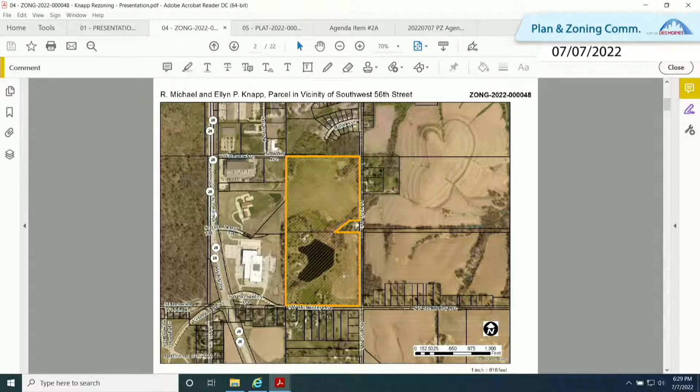This map provides a little more detail regarding the change in zoning and land use, because there are a few different zoning districts and land use designations that overlap within the property. As you can see, the portion to the north that's yellow is already zoned N2B residential.

This portion here is being rezoned, requested to change from business park to low-density residential, as is this portion to the southwest. This large white area in the middle is an airport development control zone covering part of the property, and this triangle to the southeast is the runway protection zone, which also has development control.

The summary is that all of these portions are being requested to be rezoned to N2B, except for this small outlot identified in the large-scale development plan, which is essentially the runway protection zone that is not developable per airport regulations.

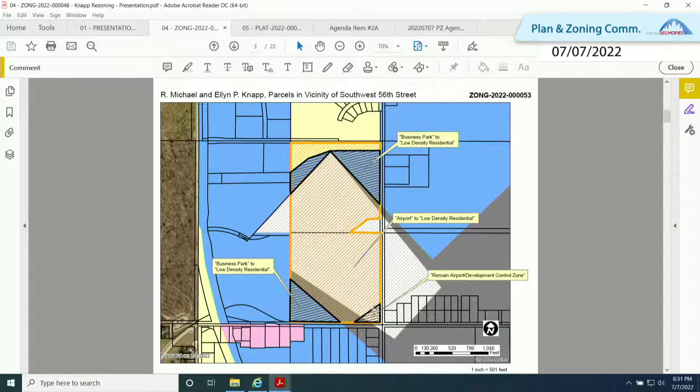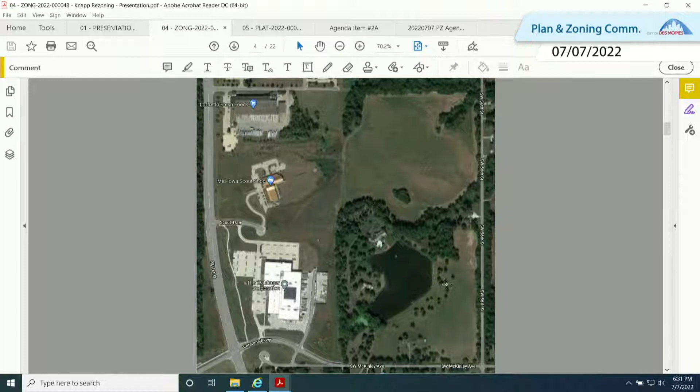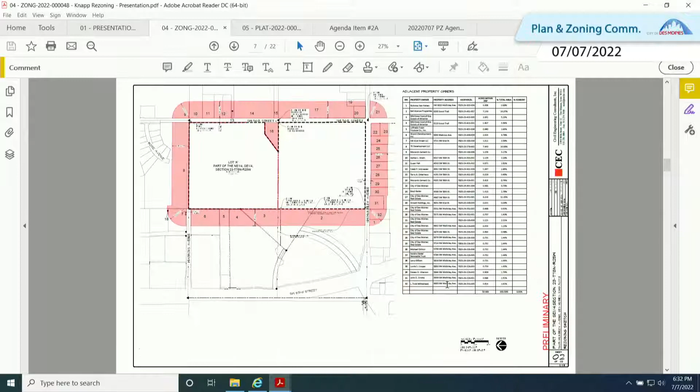This is the rezoning sketch submitted by the applicant — again, I apologize for the slow transition between slides. Here is the large-scale development plan that was submitted.

The applicant is currently proposing to develop the northern parcel, so you can see the proposed layout here. There are currently no plans to develop the southern parcel, but per our large-scale development plan requirements, contiguous parcels belonging to the same landowner have to be included in the plan, so it's shown here as well as in the rezoning proposal. The undevelopable outlot within the runway protection zone is also shown in the plan.

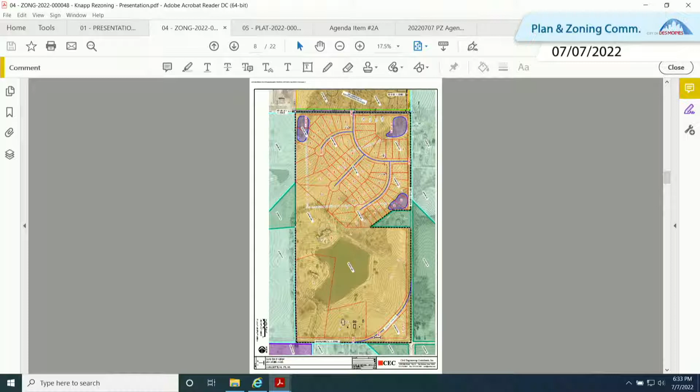With that, I'll move on to the staff recommendation. Staff has reviewed the rezoning request, and we believe the rezoning to N2B and residential use is appropriate for this area. There are some conditions that need to be adhered to, so staff has worked with the applicant and been in communication with the Des Moines International Airport to ensure any future development concurs with all necessary regulations. Staff is recommending approval of the rezoning with 6 zoning conditions, and I'm going to zoom in so you can read them.

It's not frozen, but it's not connecting to the projector. I can put the...

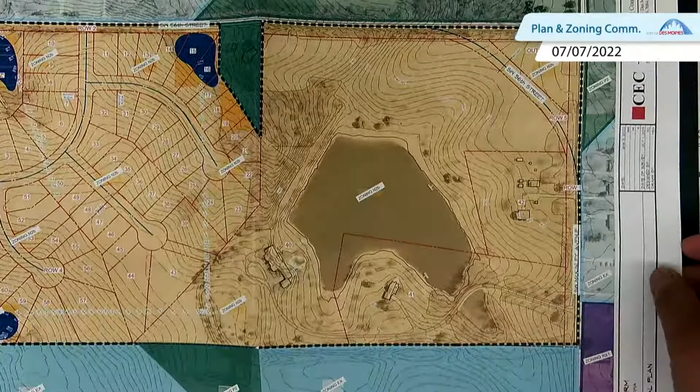Yeah, that was my only concern, because I knew the development was going to take place, and noticing that it does clip part of that property, I didn't know if that would be a problem for the airport's development, and then would it be a hindrance to the potential residents living there. But as long as it meets spec and it's okay, that was my only concern.

Yeah, the runway protection zone is the area that the Federal Aviation Administration describes as the area which might be prone to risk if there is an airplane crash or something while landing or taking off. So there's a kind of a buffer that goes beyond the runway area, which is identified as the runway protection zone area.

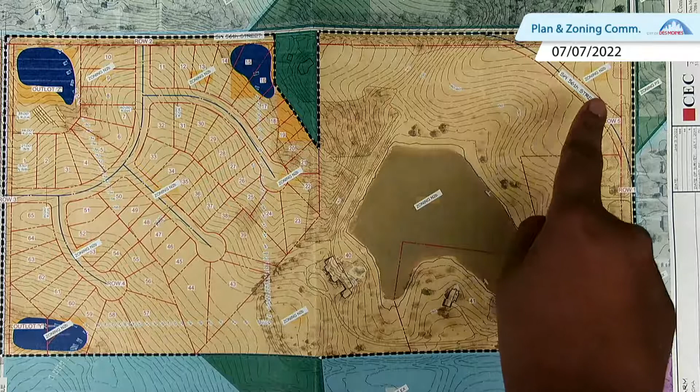And here's the corner that Bert was talking about, with the updated airport plan. This is the only corner that falls within the runway protection zone now for these two parcels. There are other adjacent parcels that have portions of the runway protection zone going through them, but for these two parcels, that's the only corner. That's also why Southwest 56th Street is being realigned, you can see how it curves right here, to essentially get it out of the runway protection zone.

You were also saying that development would be required for the rest of that land? Are you talking about the parcel to the south? No, it is not a requirement. The current zoning is not appropriate for this area because a lot of it is zoned business park and public, P2 public district right now. The applicant can talk about this more, but from what we understand, they don't have any intention at the moment to develop this area. If in the future they do, they would probably do low-density residential, so the N2B zone would be more appropriate than P2 or EX district. Thank you.

Are there any other questions from the commission? Okay, seeing none, thank you, Shriyoshi. If the applicant can present, they have 10 minutes. Please state your name and address.

Paul Clausen, Civil Engineering Consultants, 2400 86th Street, Unit 12, Urbandale, Iowa. Just to hit on a few things: given the vicinity of this to the airport, there is a noise avigation easement which sets restrictions and building requirements, and also elevation requirements for the glide paths for the airplanes, which is why we're not proposing any development with this large-scale development plan on that south portion. There's really too many limitations with the elevations to build a house on that property.

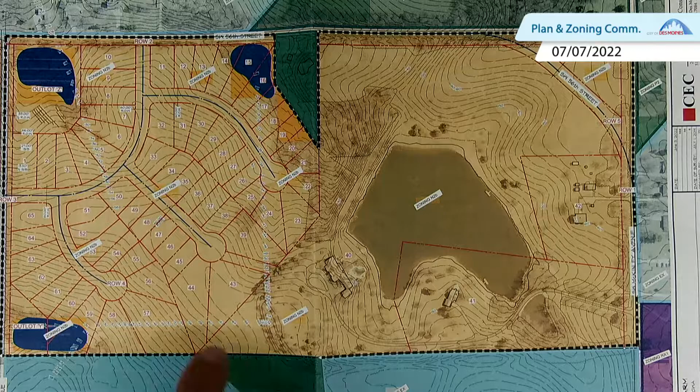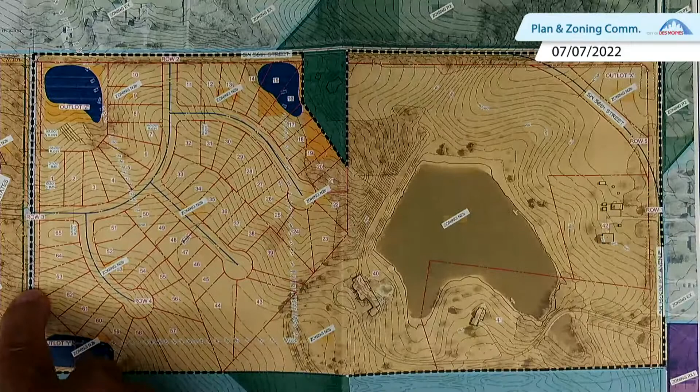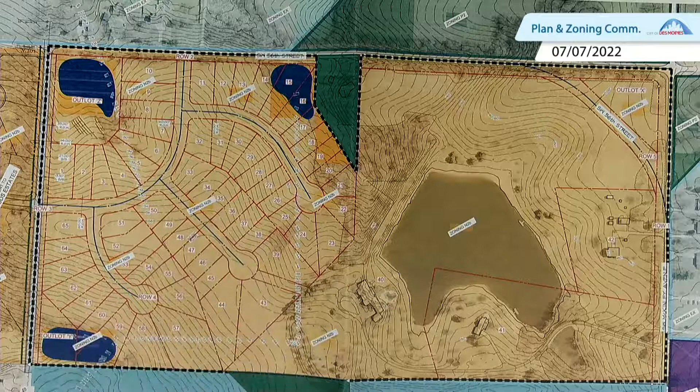So it would change the large-scale development plan? It would what? This is your large-scale development plan that we have. Oh yeah, I mean, it was like... I don't know. Well, what I'd like to suggest is maybe we just get this on the books, move this forward.

Get it on the books, and then if you want to tweak something, I mean, obviously we had a speaker tonight that was pushing density, and we wouldn't be opposed to that as staff if it's done right. So, but I would need to continue it, we would need to update the large scale development plan, and I just think it slows you down. I agree with you. I don't think anybody would object to it in the long run, and I don't know that I want to do it, so. Okay, if that works, let's just do that, so we can get you moving forward. Yep, all right, thank you.

If this has been resolved between the city and the applicant, which I think it has, then I'd move the staff recommendation.

Sorry, Carolyn? Okay, that's what I thought. I was moving to vote, but then I thought Carolyn had something to say.

All those in favor, raise your right hand, please. Johnny, how do you vote? Yes. Dory, how do you vote? Yes. Passes 10-0.

Okay, moving on to item number 5, I'm not following my scribbles. Item number 5, is that right, Nick? Yeah, let's try it, if it works. Hey, Tyler, could you flip it back?

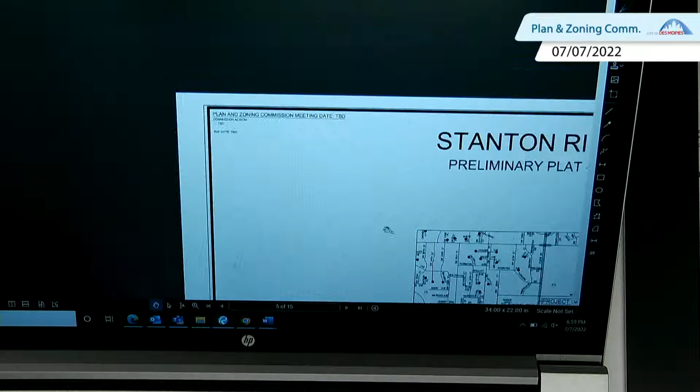All right, so I've got to zoom out now, digging into the plat document here. So here's basically a basic layout of what they want to do. Here's the street extension. The cul-de-sac would get reconstructed to mirror a typical public residential street section in the city of Des Moines, curving all the way up to Stanton Avenue. Here's all the lots, 26 lots like I said earlier, each larger than 8,000 square feet, so these are relatively large single-family type lots.

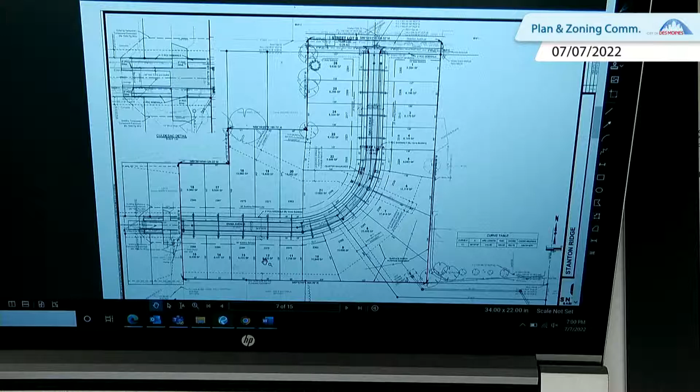A couple of conditions I want to note as we dig into the staff recommendation. The zoning of this property is N3A Neighborhood District, which necessitates house type B, so as one of the conditions for future development on this plat, all of the homes would be developed with that house type B architectural style in terms of building siding, building materials, that sort of thing.

Additionally, public sidewalks are required on both sides of the street. We made that a condition of approval, required as part of the public improvements. In terms of utility hookups, the applicant is proposing to extend existing public utilities and tap into those to enhance that public infrastructure, so their sanitary sewer, storm sewer, and water service will be provided within Emma Avenue, connecting to existing off-site city infrastructure to the west. The engineer is here tonight and can talk about that in more detail than I could.

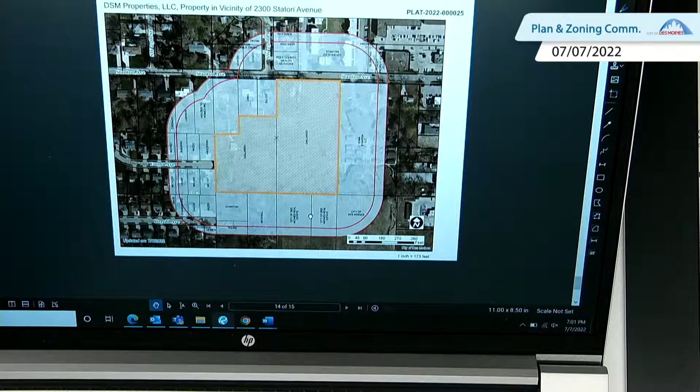We didn't receive any comments beforehand. I was able to talk to some folks before, and they might come up again and talk about this a little bit, but beforehand we did not receive any comment cards. So with that, I'll take any questions.

I have a question. With the aerial map that you have up right now, there's a couple structures on the proposed development area. Have those already been removed, or are there plans to remove them, or are they staying?

I believe this one has been removed so far. There are plans to eventually remove both. So this one, both of them will go away. I believe this one has already been removed, and this one might be in the process of. I'm not 100% sure. The one on the western edge, is here.

Is that a garage? It's a shed. Because it looks like there might be a driveway going to it, but that could be a shed. It was not a dwelling, basically.

And the other dwelling has not been removed yet? Correct, as far as I know. I think the image that I actually showed from earlier actually showed that, so it was still there.

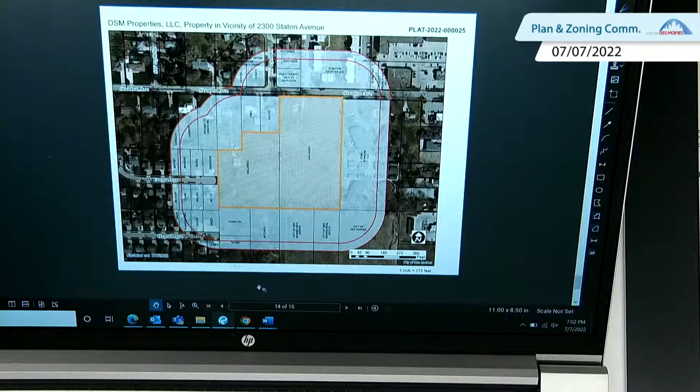Any other questions? Seeing none.

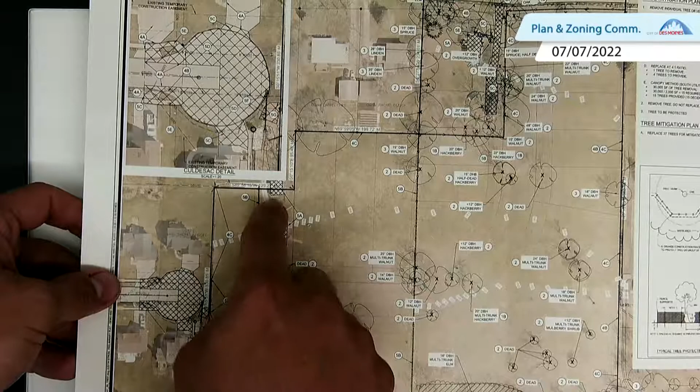To address one of your questions you just asked, that home that's on the west half, over on this side, this garage right here, this was a single parcel all the way back to here and has since been replatted back to this line. So as part of that replatting process, this owner removed this garage back to the property line. So it shows up on here, it's removed now, it's been replatted so that it can be encompassed in this new development. The existing lot on this side is planned to be removed and encompassed into the development.

It has not been removed yet. We're waiting for approval on these plans before we initiate that process.

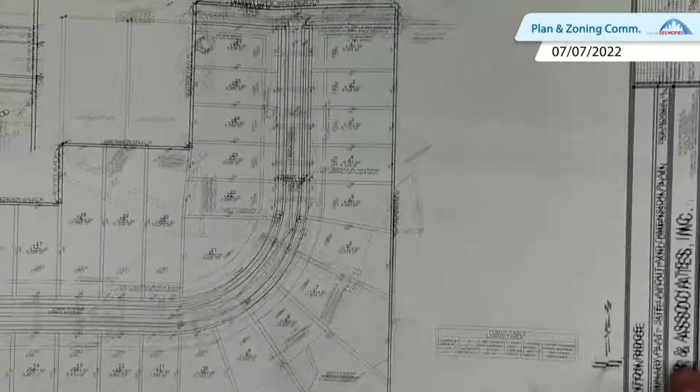One of the primary things I wanted to point out was the utilities. The plan is to extend water main from Emma all the way through and up to Stanton. Sanitary is actually located all the way down to the east, and we're at the bottom of the world down here. So the way we're pulling in sanitary is through the airport property up into the development in order to facilitate servicing all of these new lots.

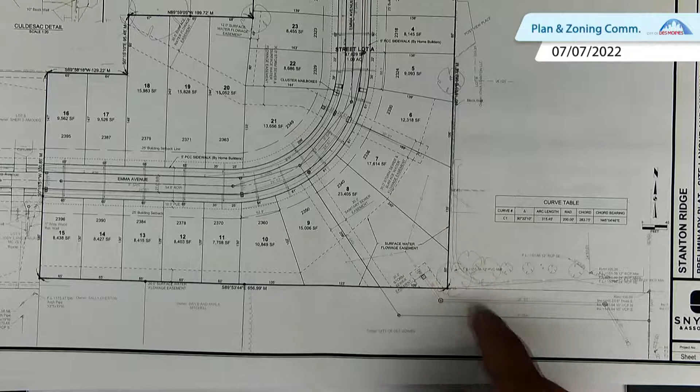Stormwater, same thing. The low point of the site all drains down to here to provide enough depth and volume for us. We're also utilizing that same corridor we're doing with the sanitary and piping it down to a further elevation. All of these improvements on the airport property have been coordinated with the city. They're all below ground infrastructure improvements that don't impact any grading or any issues with the airport. And as these are public utilities, we've been able to coordinate no requirement for any easements, as the city owns the land that the utilities are going through.

I know one of the homeowners on this corner is here in attendance that we talked to earlier before the meeting started. There's a small detention facility that's located there currently. All of the storm runoff from Emma Avenue on both sides of the street pools and is facilitated into this right now, along with the runoff that comes from the back of the homes. As part of this, we're pushing through Emma Avenue, so all of that drainage that was directed into their pond will now continue into the storm sewer infrastructure and through the street down to our new pond down here.

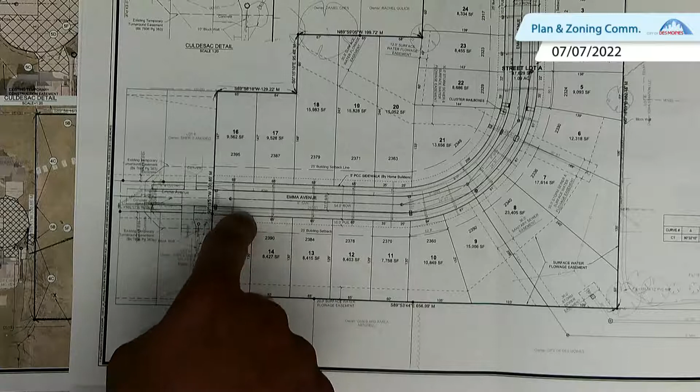We won't be able to get rid of this facility as it directs all of the runoff from the back of the yards behind and through, but we'll be able to mitigate and reduce substantially the amount of water that's able to sit and stand here in today's conditions. And I know they were talking about having some issues with the existing pipe that might be out there right now, might be plugged or it might not be functioning as it does today. So as part of these improvements, we're taking that out and just facilitating a way to provide the runoff a path to go to our new detention facility.

Got any questions? Otherwise, we can give opportunity for others to talk, and then I can come back up for questions too. Are there any questions from the commissioners? All right. Seeing none, thank you very much.

If there is anyone from the public who would like to speak in favor of this or neutral, you may come forward.

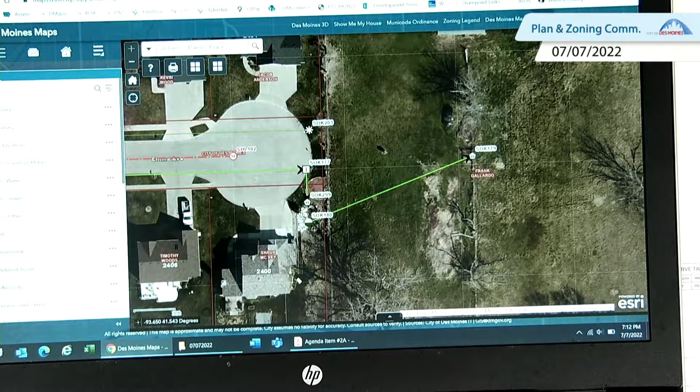Justin, I think you noted a little bit about this in your presentation, what will take some of the water pressure off of that with the street extension, but there's some stuff that will still come out of the backyards. I guess one thing I wondered is, how much conversation have you had with our engineering staff about any modifications.

I think what I'm hearing from the neighbor is that there's a sense that maybe that could be modified in a way that operates better, or maybe he has concerns about safety as well, or the boulders moving. I don't know if you'd had those kinds of conversations with our engineering staff.

I think the goal was to reduce it as much as possible. I don't think we noticed that it was necessarily broken up concrete and stuff, I think we thought it was just riprap. If it's a little messier, there's an opportunity to clean it up. The only way to necessarily get rid of it is to extend a pipe all the way to the back of the property, more in line with where the, I'll call it a ditch along the back of the homes, is going.

Any attempt to fill that in without any infrastructure extending back is just blocking the water, forcing it to stand there. So unfortunately, there's a lower point on the back of the homes that we're unable to completely get rid of. So we're looking to take most of the runoff that was being facilitated directly to it and direct it away from getting there in the first place.

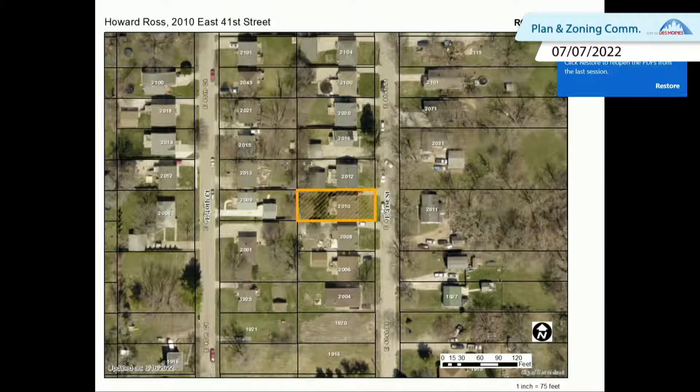The subject property is located on the east side of Des Moines, on the west side of East 41st Street. Here are photos of the subject property, and some street views to give you context on the neighborhood it's located in.

The applicant has an existing 10-foot wide driveway and is proposing to add an additional 14 feet of width, bringing the total width to 24 feet. The existing 10-foot driveway is in compliance with the front yard impervious area requirement, comprising about 20% of the front yard area. The proposal would bring the impervious area to 48% of the front yard, which exceeds the code requirement of 25%.

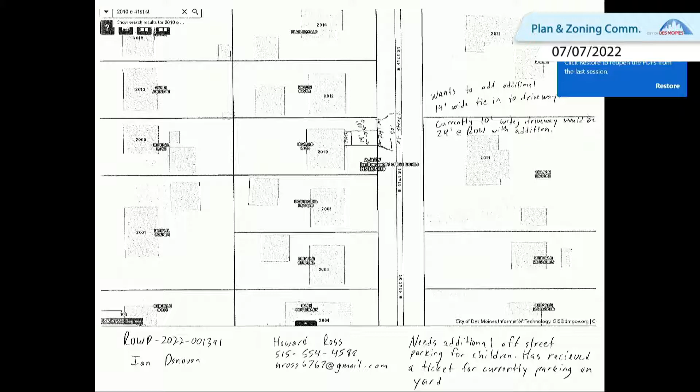This is a sketch provided by the applicant showing the dimensions of the proposed paving. They would also widen the driveway approach to accommodate the 24-foot wide driveway, so it would be 24 feet wide at the property line, then flare out to 30 feet at the curb line. Here's another view provided by the applicant showing what that new dimension would look like.

Staff feels the expansion of the paving is out of character with the neighborhood. The paving would be in excess of 48% of the front yard area. We've had a number of applications in front of you prior to this one for expansion of driveway area. Staff has supported expansions up to 40%, which is the highest we've supported, so this exceeds the threshold we've supported in the past.

So staff is recommending denial of that. We would be supportive of a smaller expansion up to 37.5%, which would allow the applicant to add about 8.5 or 9 feet of paving, bringing their driveway width to about 18.5 or 19 feet, providing some additional parking space, which is what the applicant is seeking to do. In summary, staff is recommending denial of the current proposal.

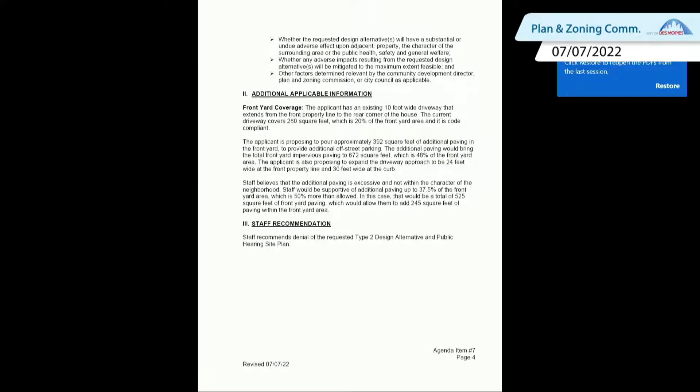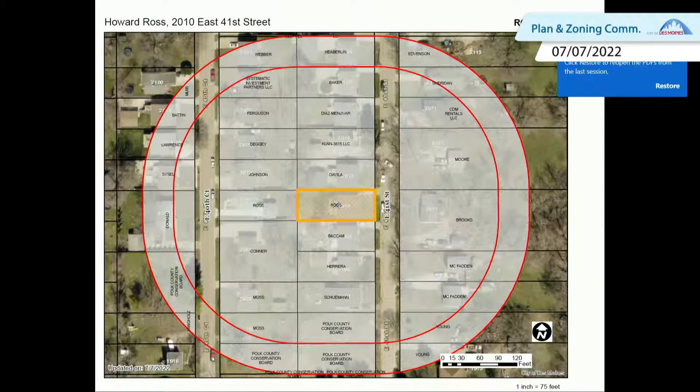We did not receive any comment cards from the neighbors, but we did notify neighbors within 250 feet of the subject property, so this is the map showing that notification area. That concludes my presentation. Are there any questions?

Are you recommending that the apron be widened as well by that 8.5 to 9 feet? We would be comfortable with them expanding not the full 14 feet, but an additional 8.5 or 9 feet. That would bring the width down on their private property, but we would also match the drive approach to that width, so the drive approach would be 18.5 or 19 feet wide, with a flare of an additional 2 or 3 feet, as you typically see on those drive approaches.

Did you have a question, Will? No? Anyone else? All right, thank you. Thank you, Kyle.